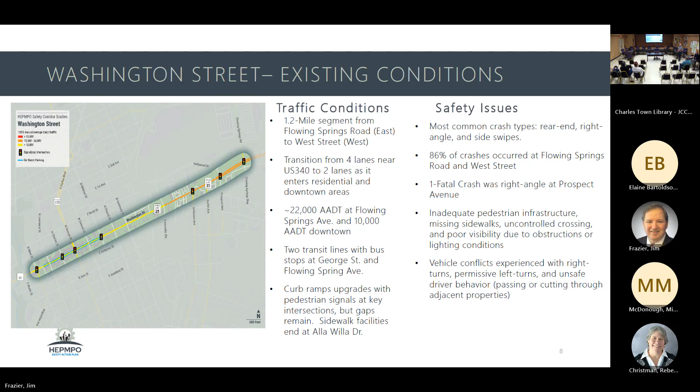Now a little bit about future conditions, first at the state level. The state is required to do a vulnerable road user assessment, basically looking at all non-motorized users, including motorcycles, pedestrians, and bicyclists. West Street to George Street was identified in the state study as a priority VRU corridor, which means it could potentially be a priority for finding opportunities to get some of these safety improvements installed.

Obviously there's a lot of redevelopment going on here, especially with the American Public University transition into those facilities, as you're probably more aware of than I am. We looked through some of the planning efforts from the most recent comp plan, the 2040 comp plan, which adopted a complete street approach.

There are some safety improvements identified in that plan, and also new connections identified. I didn't lay those out, but I don't think any of them have advanced — new connections to get some of that traffic off of Washington.

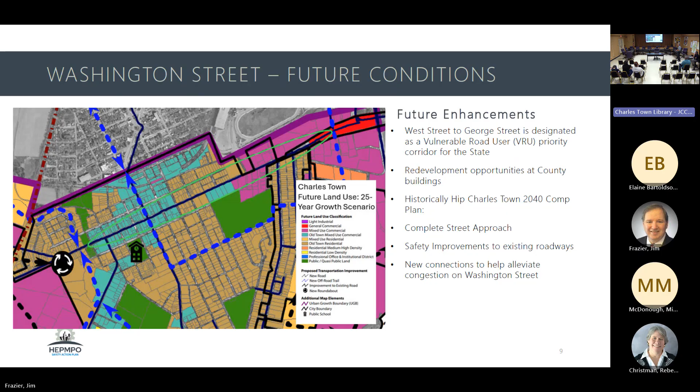We'll mention too that there's a couple of appendices. One is the federal highways safety tool that we incorporated in this study. There's also preliminary planning level costs for all the recommended concepts that we provided in the study.

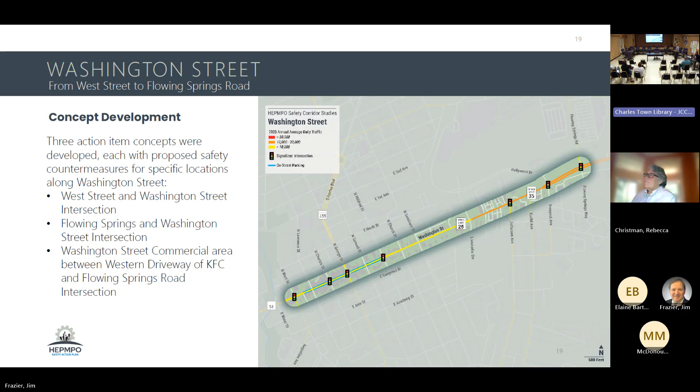Okay, starting at West Street. Obviously, the main safety concern we got, especially from the on-site visit, was the traffic coming in on West Street and then cutting right through over the curb onto Washington Street. So that was the main thing we wanted to address.

What we're looking at here are safety countermeasures we're identifying, which are part of the MUTCD and federal highways listing of proven safety measures that we pick and grab from. But as far as this intersection, Rebecca, you want to take over and lay out what we're doing?

Sure. The big factor that we noticed in the field visit and was brought to our attention was the existing condition of this Liberty gas station, that it's just paved basically to the edge of roadway. The curb is insubstantial and it's almost like the whole thing is a giant driveway.

In the existing condition, it's just one lane coming into this approach, and there are frequently people who want to turn left and they block up the traffic at the signal. So there's a pattern of motorists cutting the corner through the gas station lot, creating a sense of peril for pedestrians at the corner and in the lot itself. There's a crash history of vehicular crashes in the parking lot and the cut-throughs, all on this quadrant.

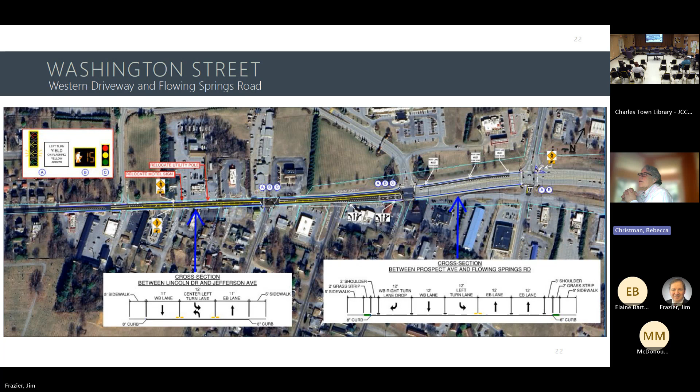This will focus more in. So on this one, you can see it's kind of what I was describing. However, right in the middle there's an uncontrolled pedestrian crossing, but it's not officially a mid-block crossing because it's at an intersection with Alla Willa.

But we're recommending it. Right now it's just this brick thing that you can barely see. We're recommending to make it pop with a high visibility crosswalk, ADA features, and RRFB, rapid flashing beacons, that can be actuated by the pedestrian.

Those are school bus stops too, almost right where you have that crosswalk, because there's a high amount of traffic that goes through since the school bus comes this way and picks up. That's near the Kentucky Fried Chicken.

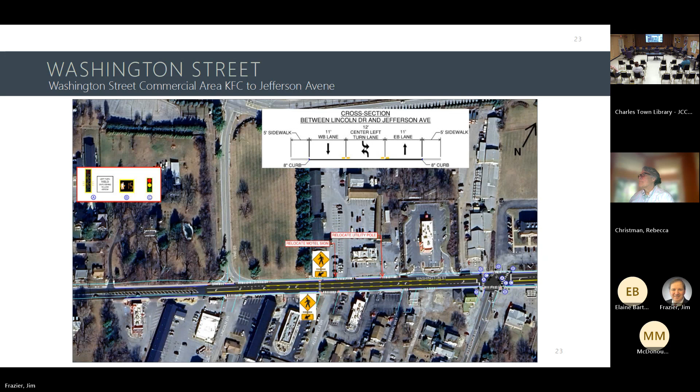Agreed. Okay, let's keep going, then we can move to this, the other half of that segment.

This one is focusing on the pedestrian accommodation at the signalized intersections and the transition from the 3-lane section to the full interchange section, coming in to accommodate that full amount of traffic before much of it breaks off.

So this is just showing the signalized intersection improvements we've talked about, as well as a change in the lane configuration, basically a lane reduction through this segment. The lane drop right now happens in this block in a westward direction, and we push the lane drop to the east, dropping it in the section before Hollywood.

So we're continuing to open it up to enter the full lane section on the other side, because that increases the throughput of the signal and reduces the needed green time. That allows more time for pedestrians crossing that full section on the right, so you don't need that center median refuge area. That would reduce queuing back through this block.

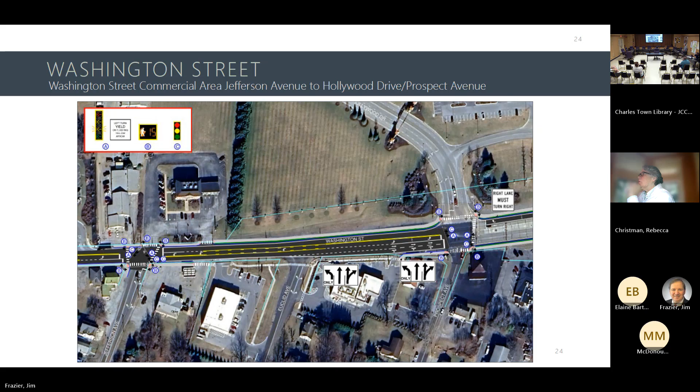Oh good, I didn't do much talking. All right, he's gonna go after Ken next then. Okay, are we good here then? All right, one more here.

And this is just showing the lane drop, and building a sidewalk, reducing the lanes - basically that reduces the crossing distance for the pedestrians here. And then the signal improvements.

Now, this would not be the full signal improvements for Flowing Springs. This would be more of a quick fix to address the pedestrian situation, but not do the big lane changes. It's a lower cost option of doing the corridor, but not the full Flowing Springs recommendations.

And in this case, you see it's just putting in pedestrian features and striping up the crosswalks, but leaving out building the medians or anything like that. So this is getting to the end of the study area more cheaply, breaking out the different options of implementation.

When can we get the stripers out there? He likes the striping. Oh, good. Yeah.

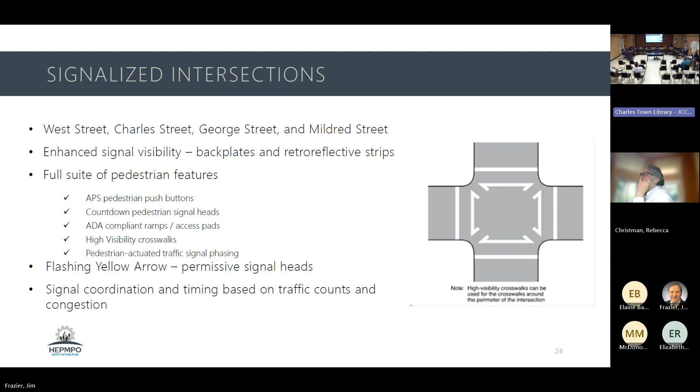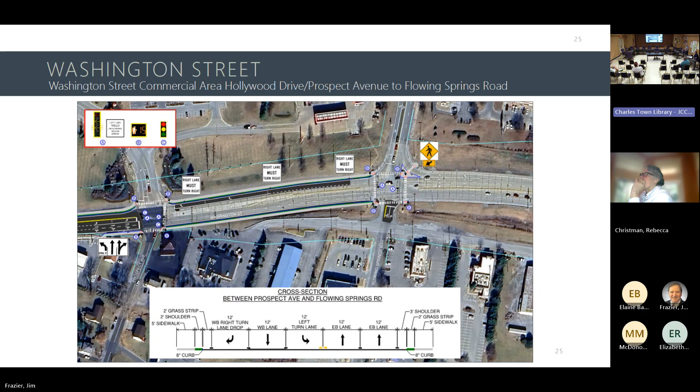All right, so that was it for the conceptual side. Can we go back to Washington Street? Because I don't think we got warmed up when we go to west, very first.

So on this intersection, West Street and Washington Street, all of your observations I think is what all of us have seen at that intersection. But I also know that intersection connects to where kids walk to school, because right there is a walking school. I appreciate the dedicated turn lanes, but my concern is that if you actually go to the intersection and try to make it accessible...

...we won't be able to have both dedicated turn lanes and an accessible crossing. At this particular intersection, a lot of this is people speeding through, but the trip numbers here aren't that many. So it's urban behavior in an urban area. In my experience, if you were to do a conceptual of a directional PROWAG ADA crossing and get the minimum width you need, with delineators and all the pieces, it's going to require you to consume some of that lane width.

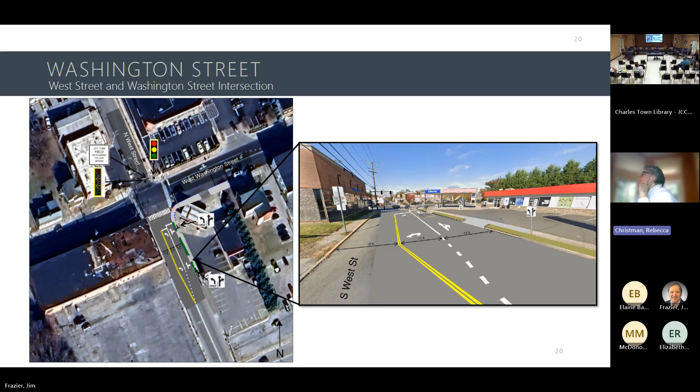Understood, I hear you. I'm going to steal your screen right now. I've got Google Maps up over here. These are all basically blended ramps, and they definitely seem to have the four feet, if they were just... they may be flatter at this point, but with a 4x4 behind the curb, they can make that turn and head the correct direction.

These actually aren't diagonals, these are blended. And if these were landing slopes, they are accessible. They can make the turn behind the curb and head out on the crosswalk in the correct direction.

A big pedestrian project is a different thing than what this focus is about. So who is this safer for?

It's for everybody. We've got a whole multimodal approach. Well, this is one area where you're adding vehicular accommodation and not adding pedestrian accommodation, except for the light. So from a citizen standpoint, in the heart of downtown Charles Town, in an area where kids walk, the question would be, what type of features could be added here that would raise the safety and comfort for pedestrians on this particular road?

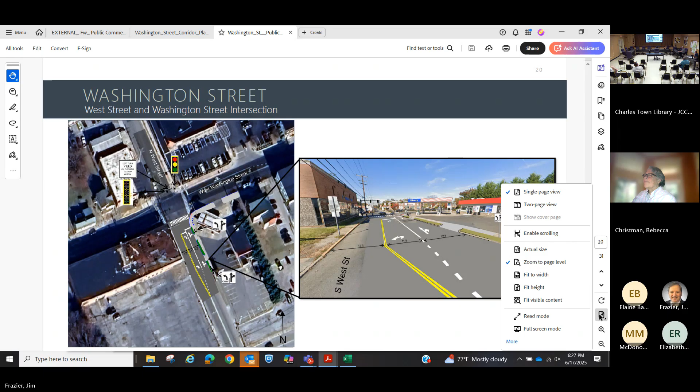All right, just to wrap this up. We do have a monitoring and evaluation component. Basically, we developed a tracking sheet for crashes that can be easily updated every year as new crash data comes out, emphasizing that any implementation of strategies can be checked to see if there's a reduction in crashes.

Our next steps: the public comment period ends next week on the 23rd. After that, we will respond to comments, finalize the study, and remind everyone of that timeline.

Just a question, if these are dumb questions I apologize, but the traffic data is from 2023. If our public comment period ends at 6/23, and we're missing almost 2 years of data, is there a point where you go back before finalizing the corridor study for a better snapshot of the current state?